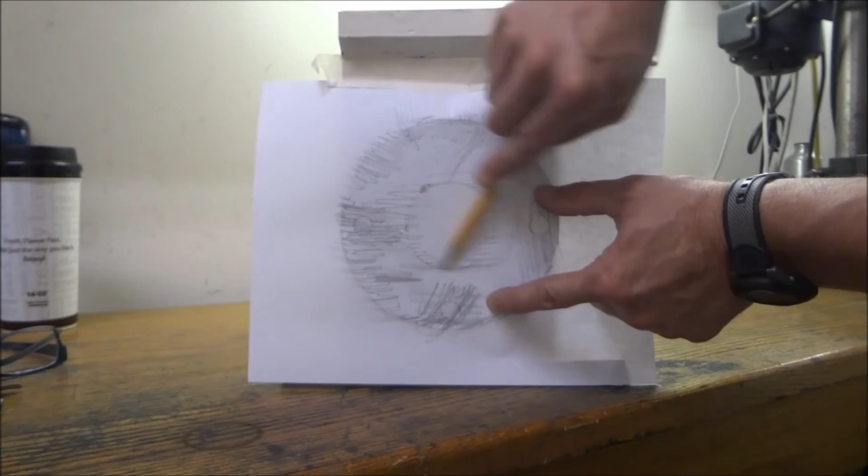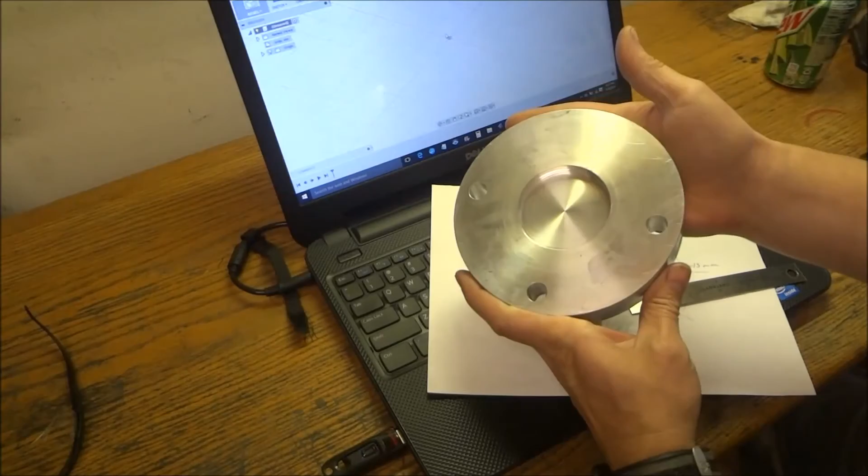Alright, so now that we have our tracing, I just took measurements off of my tracing and off the back of the gearbox, and we're now going to draw it up in Fusion 360, and then we'll go out and we'll machine our spacer, and I'll show you how it's done. Now, as you can see, I've already drawn this up and did the machining, but I want to show you how we did it in Fusion 360.

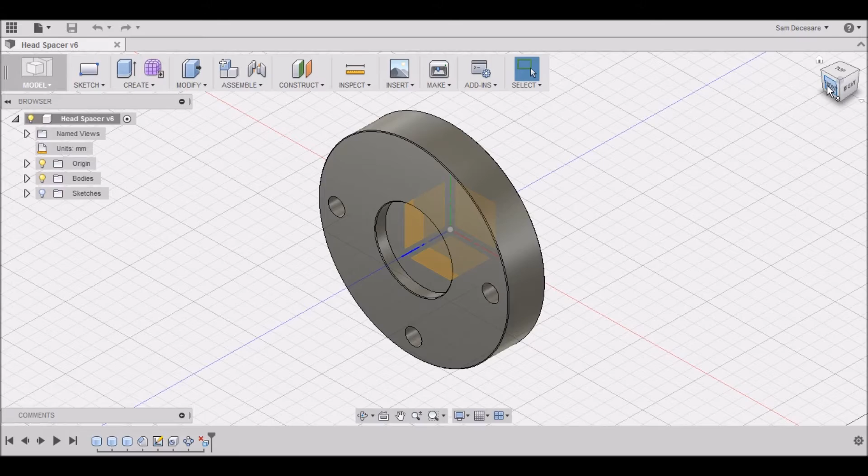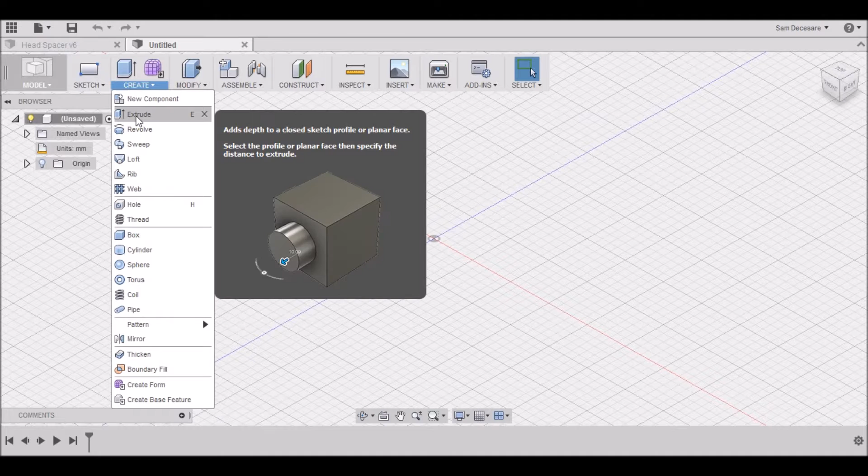So let's get started. Alright guys, so here we are in Fusion 360, and this is our head spacer for the Precision Matthews 727. Pretty simple, straightforward design. So let's get started and we'll see how this was drawn. So the first thing we want to do is create a cylinder. This is our Z-axis, this blue line. So I want to put it on this plane here. And according to our sketch, it's 148 millimeters.

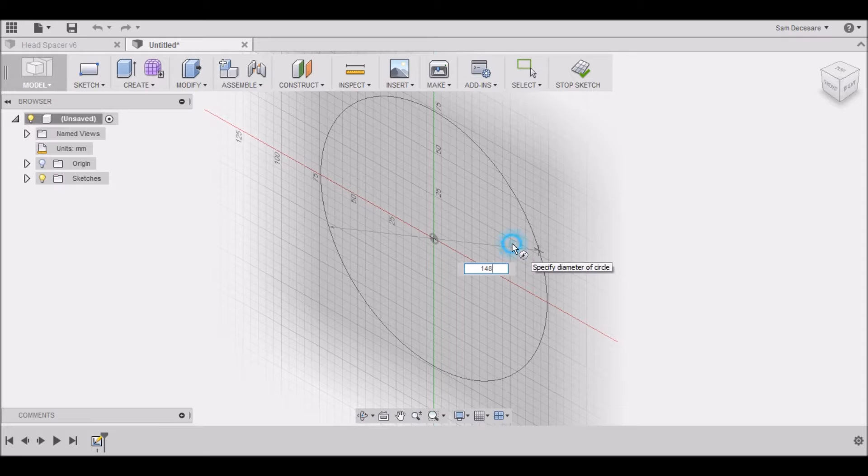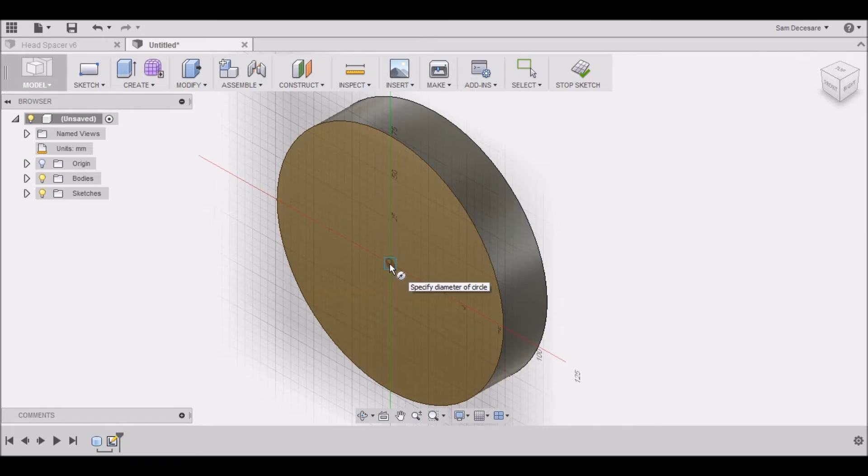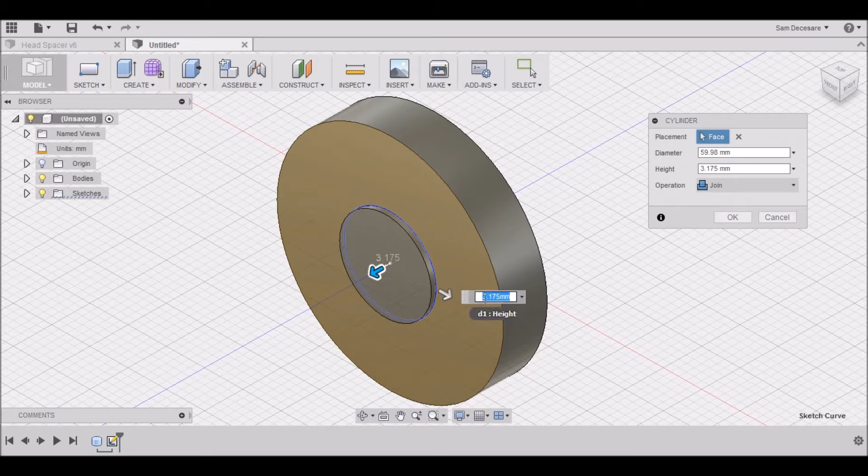Right, and we need to make this 1 1/8 inch, which is 28.575 millimeters. Alright, now we have our basic cylinder. We'll go back and create a second cylinder, and we want to put it on this space here, in the center, and this is going to be our bump out, which is going to go into our spindle, and that is 59.98 millimeters, and it is going to be 1/8 of an inch, which is 3.175 millimeters. Alright, that's our bump out.

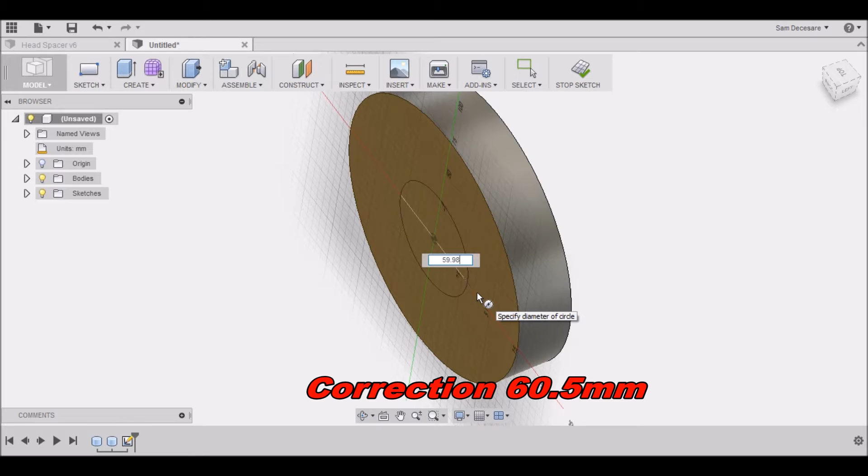And then let's go around to the back side. Right click and we can repeat cylinder. And we'll put it on that surface there. And again, 60.5. Okay, and then this time we want to go in and cut that out. And we want to go 8 millimeters. Alright, pretty straightforward and simple.

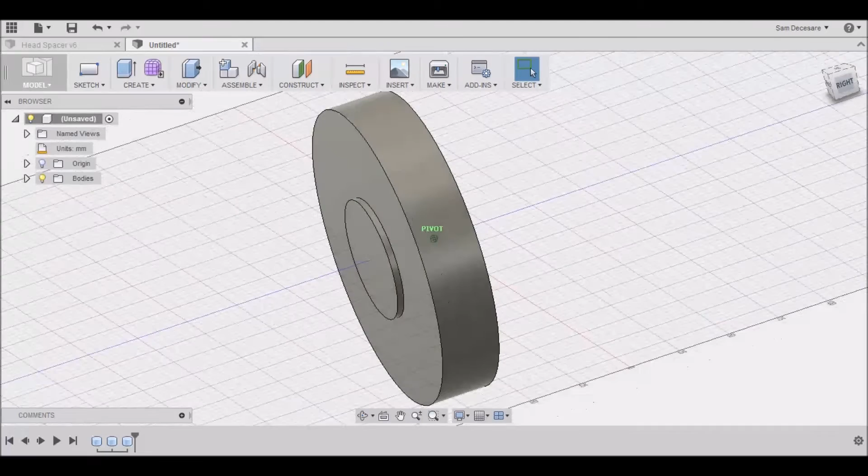Let's do a chamfer and knock some of these corners off. So go to Modify, Chamfer, and we'll select this edge. Hold down Control, select that edge. Go around to this side, Control, select that edge, and this edge. And then we just need to put a slight chamfer on there. Let's do 0.7. Looks pretty good. Click OK.

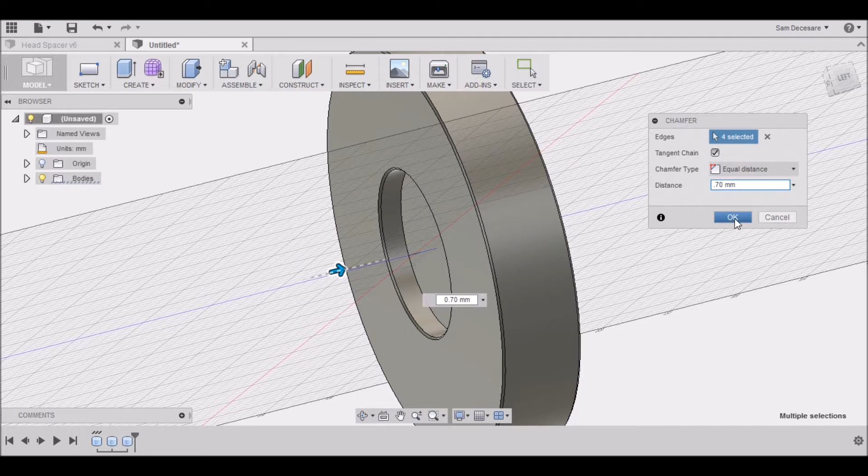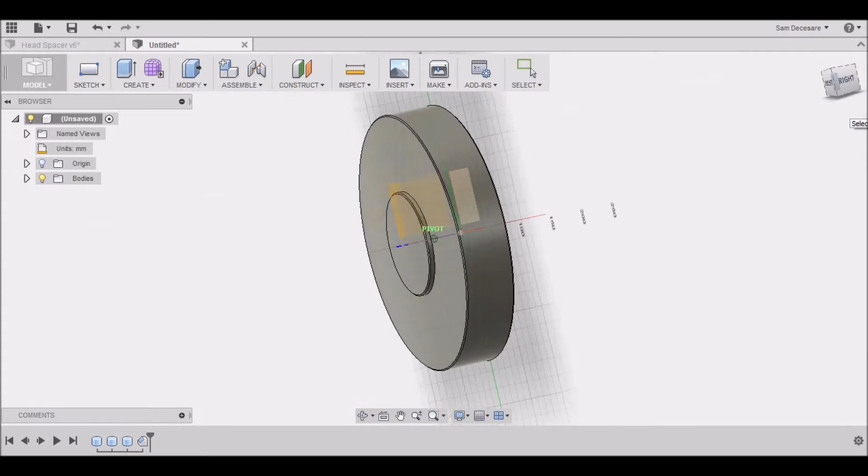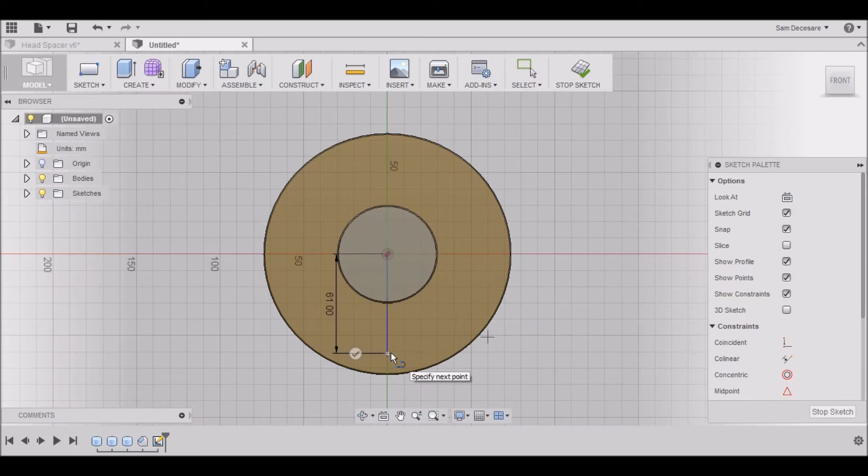Now we need to drill some holes. Next we want to go to Sketch and create a sketch. We can create it on this plane here. Alright, and then hit L for line. I'm going to go to the center. We're going to go down 90 degrees and we're going to go 61 millimeters. Then we're going to go back to the center, hit L, another line, 61 millimeters. And 61 millimeters this way.

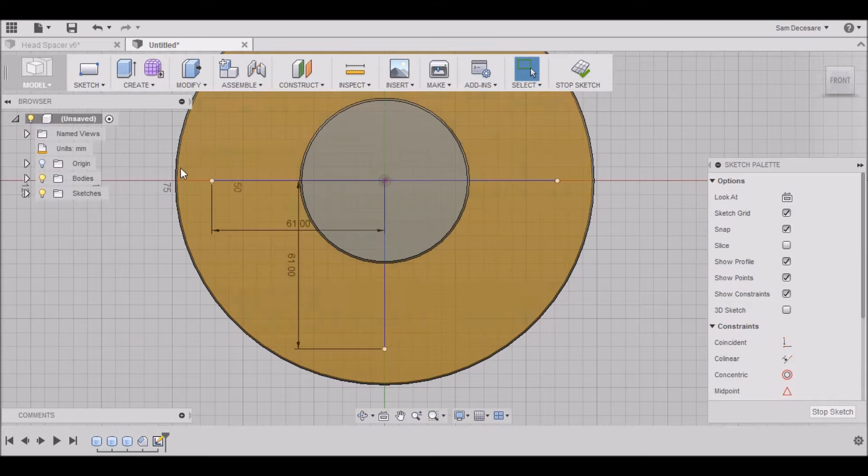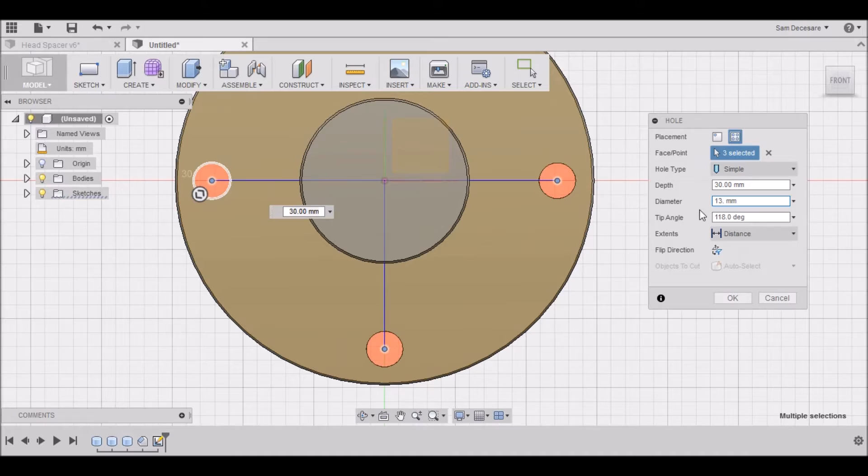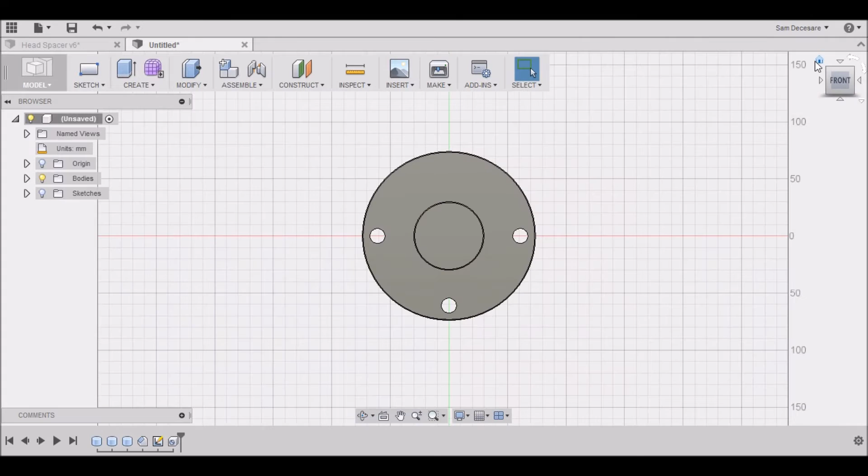Okay, then we want to stop our sketch and then we want to go to create hole. We want to do multiple holes. Here, here, and here. These holes are 13 millimeters in diameter. And 30 millimeters deep is fine. It goes all the way through. Click OK. Turn our sketch off. And there we go. We have our completed spacer. Didn't take very long. Now let's do some CAM for it.

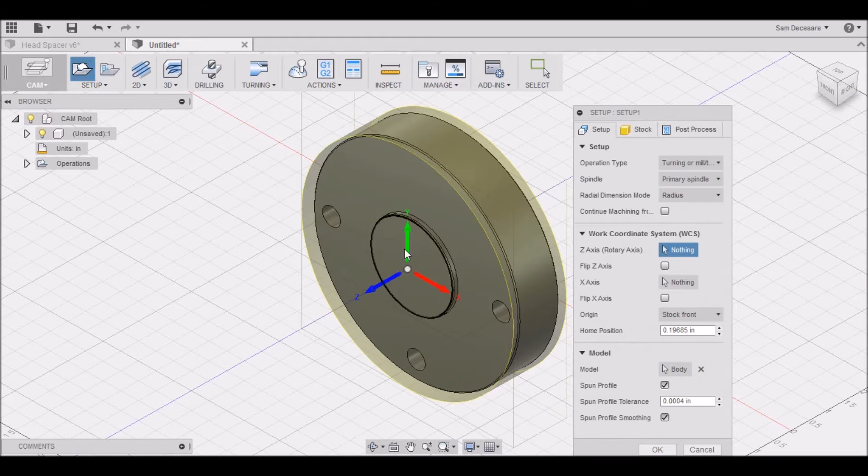So we go up to Model, CAM, New Setup. We're going to be doing turning. Check this spun profile. Because it has the holes in here, if it's a spun profile, Fusion 360 knows that this can't be machined while spinning. So check spun profile, otherwise it'll try to go down into this hole. I've had it do that before, for some reason. I couldn't figure it out, but if you check spun profile, you won't have any issues there. The stock is 6 inches and it's 1.5 inches long.

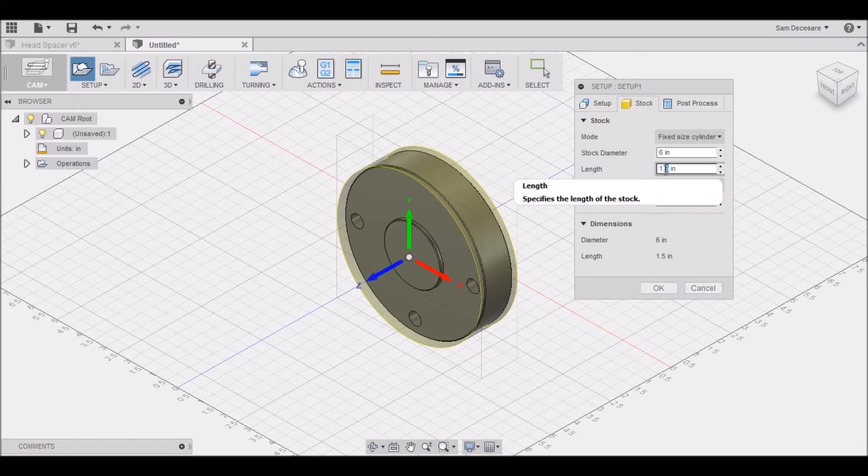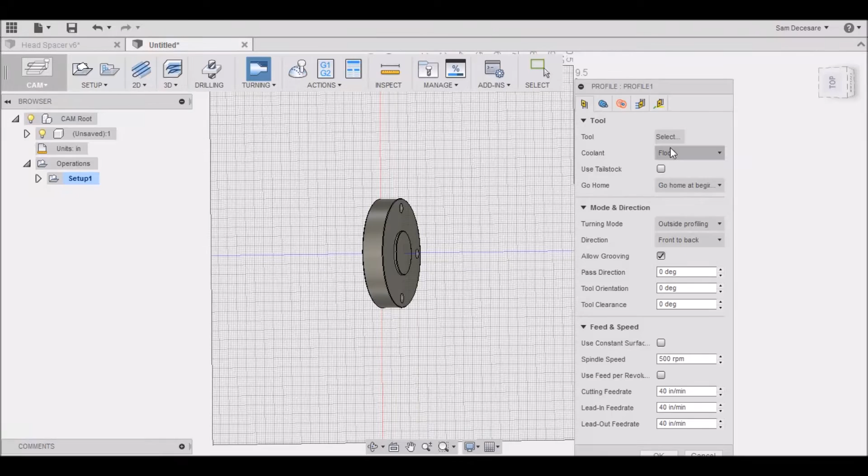Okay. Now the first operation here, let's get this oriented right. Let me tilt it just a little bit. So we want to turn profile. I'm going to be using tool number 2. This is an SDJC tool holder. Go up here to setup. Let me click this arrow and it'll put the X back down here. There we go. Alright, we're going to be going at 5000 RPMs. We're going to be using surface velocity. We're going to use feed per revolution. My feed rate is going to be 0.01.

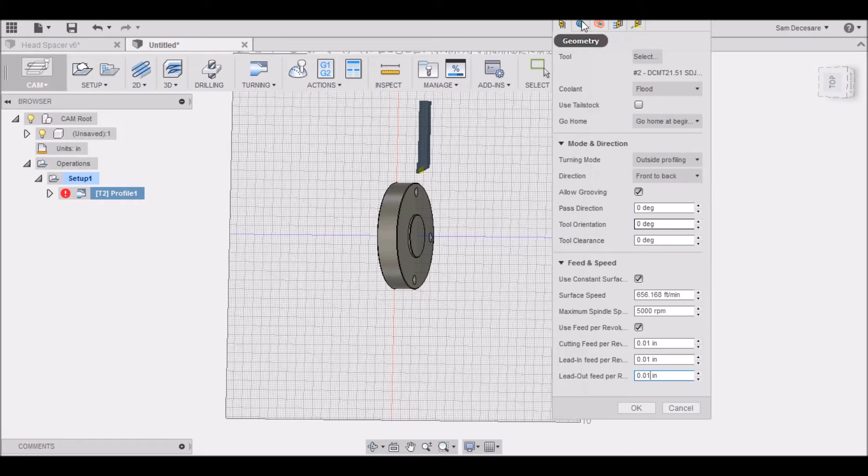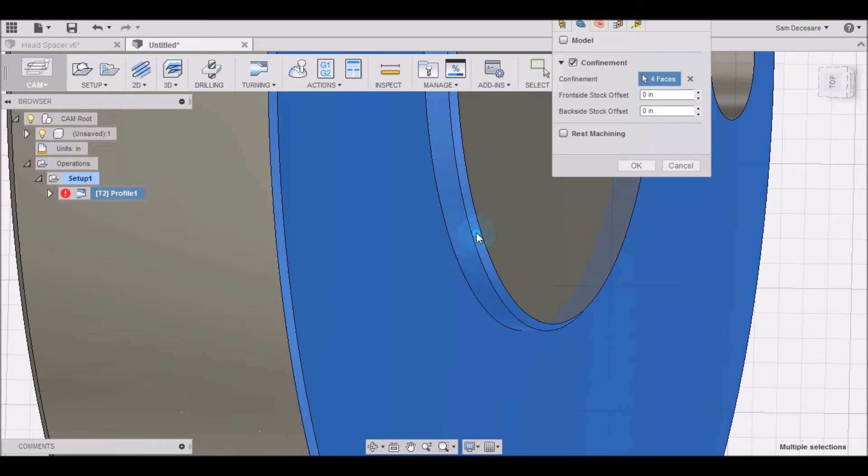Okay. Geometry. Confinement. I want to confine it to this area. This area. Right here. Right here. Alright, let's see how that works out. Step over 0.01. Finish feed rate 0.005. Step down 0.01. Okay, that's on the thing.

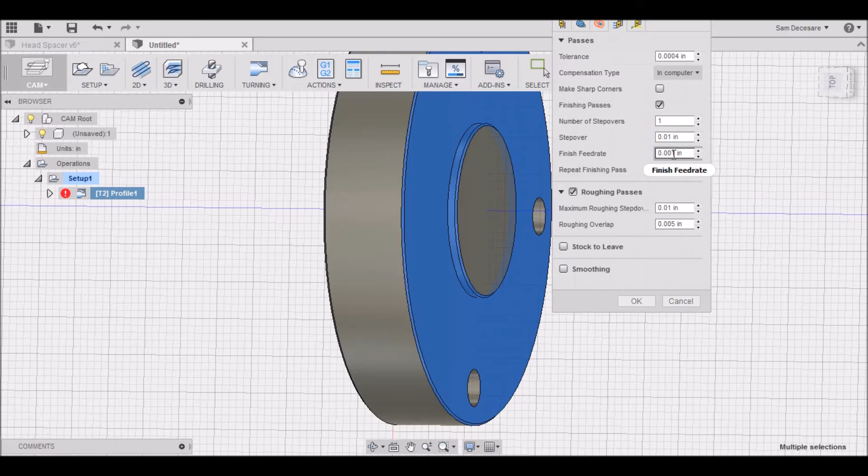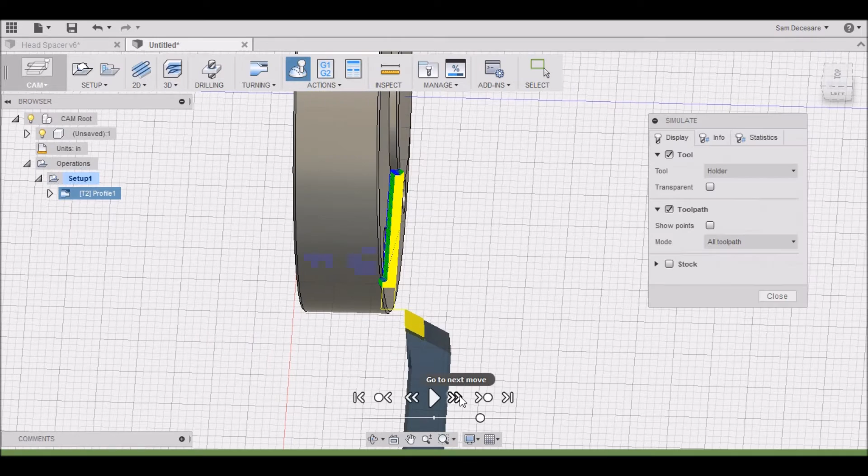There we go. Click OK, see what happens. There we go, we got it oriented in the right spot. Alright, there we go. Alright, let's see what we got here.

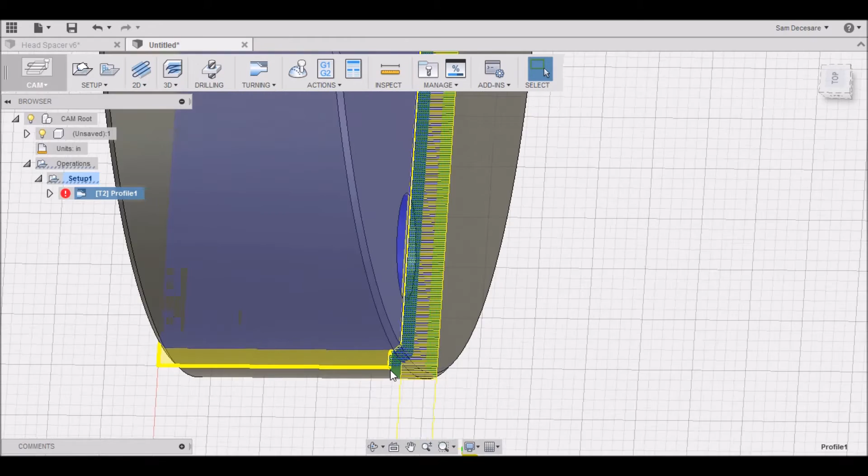Alright. Okay. It's coming all the way up to this curve right here, but it's not machining any of this, and that's good and bad. I need this machined as well. However, it's going to be in a 4-jaw chuck, so I can only do about half of it, and then I'll do the other half when I machine the backside.

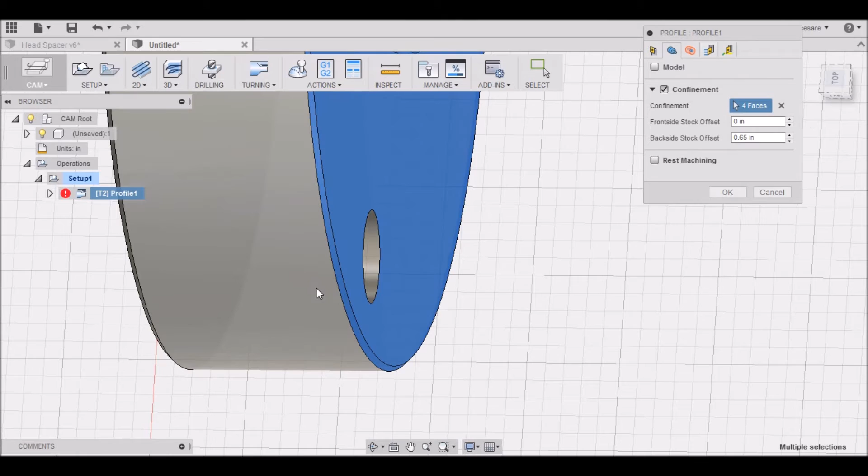So in order to get it to only do half, I'm going to go up to geometry right here, and I'm going to use this backside stock offset, and I'm going to put 0.65, and also for confinement I'm going to add this additional face here. Okay, something went wrong there, so let's go back and check it. Maybe a negative. How about that?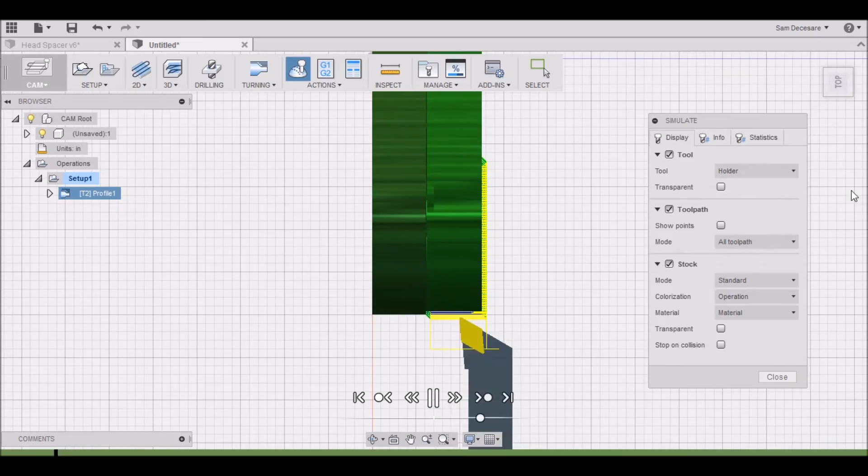So now we'll machine this and then pull out. There we go. Alright, now let's simulate this. See what we've got. Alright, pretty straightforward. We can also get this with a facing. However, I'll do that in a different operation.

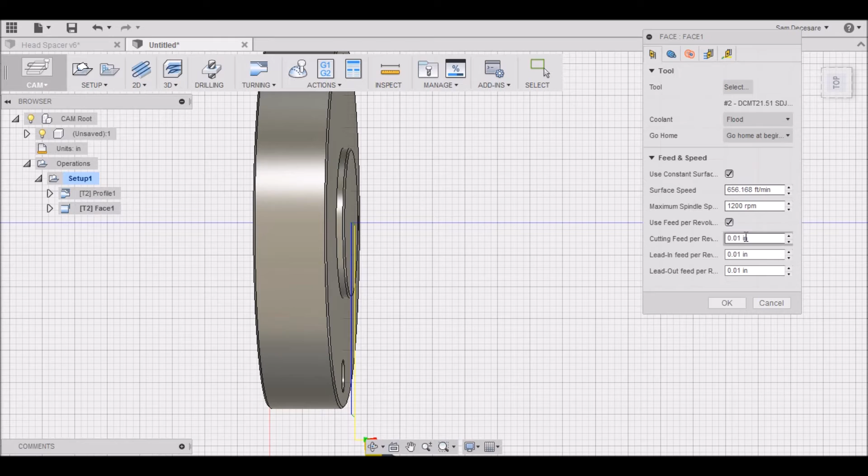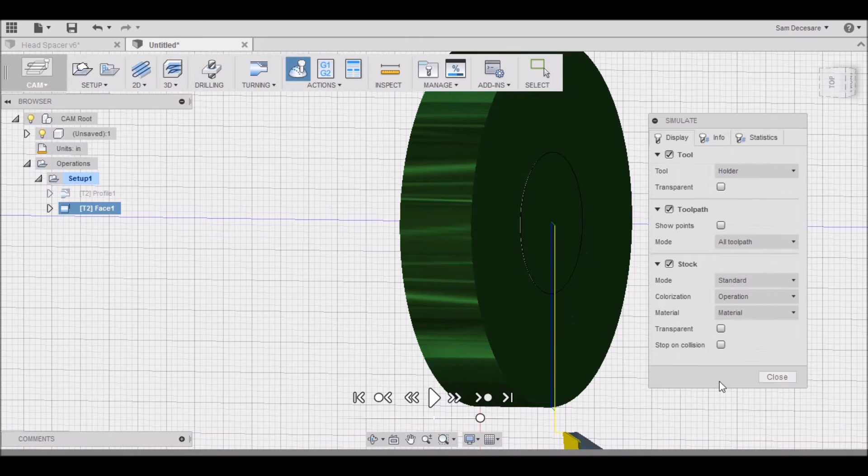So let's do turning facing. Let's actually, we can use the same tool. That's all good. We'll face that whole side there. That all looks good. Alright, let's see what this operation looks like. Alright, basic facing there. Now we can put that in the front.

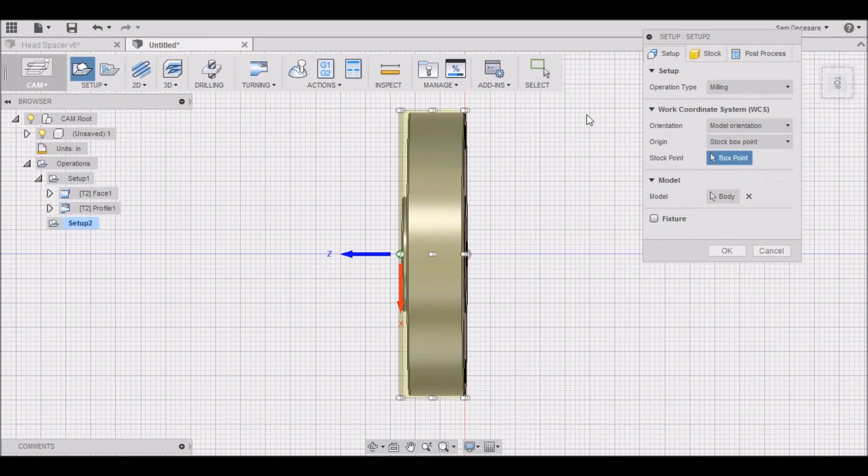Well, that takes care of this particular setup right here. Now we need to machine the back side. So let's get that set up. So we're going to do a setup number 2. And we're going to pop that over to this side. Move that over and that over. There we go. It's going to be a turning operation, a spun profile.

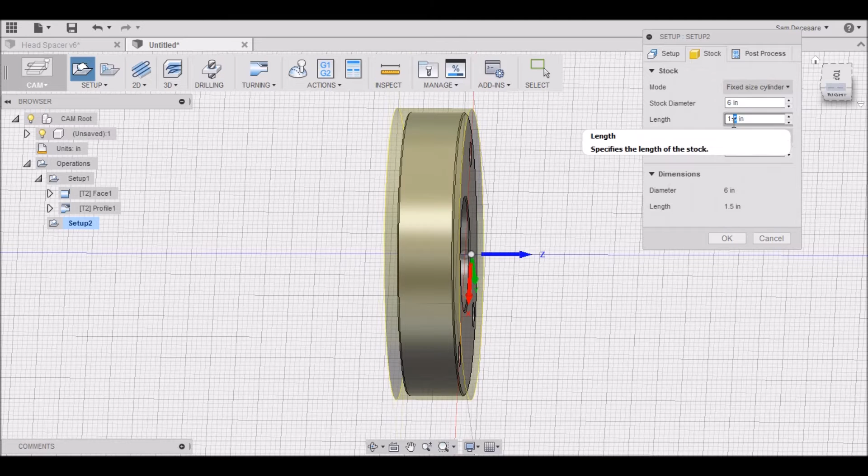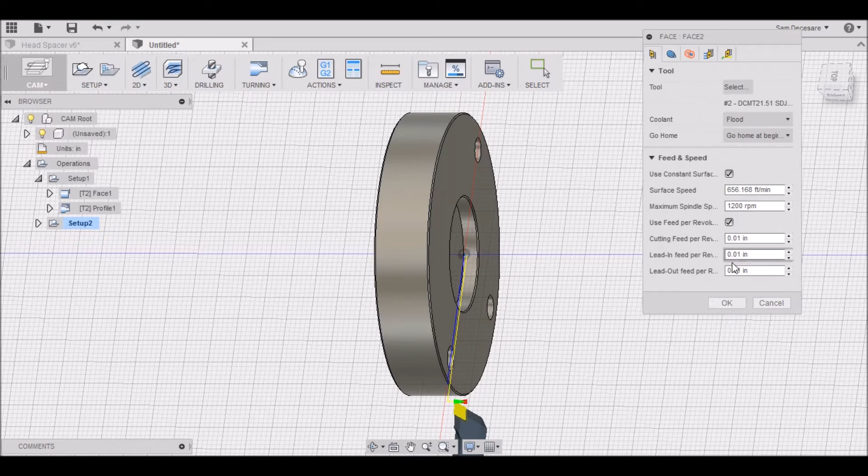That looks pretty good. Okay, change the stock. It's 1.25. Click OK. Alright, that looks good. So the first thing we want to do is, again, we want to face this. Tool number 2 is fine. All the parameters from our last are in there. Let's see if it faces this stock. Looks like it's fine. Alright.

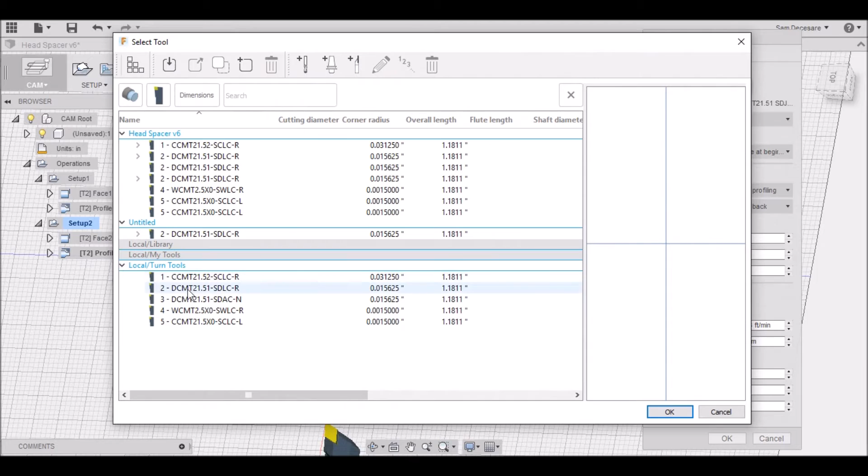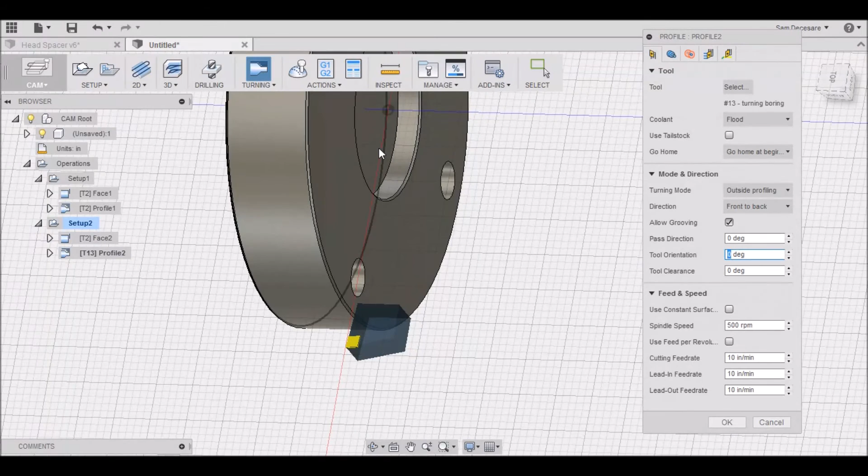And then our next operation will be a profile. Now for this one I'm going to be using a boring bar, which is tool number 13. So we got to change this to boring. Click OK. This is a DCLNR. Click OK. Our tool orientation, you can see how it is. It's already set up because this particular tool is set for that orientation.

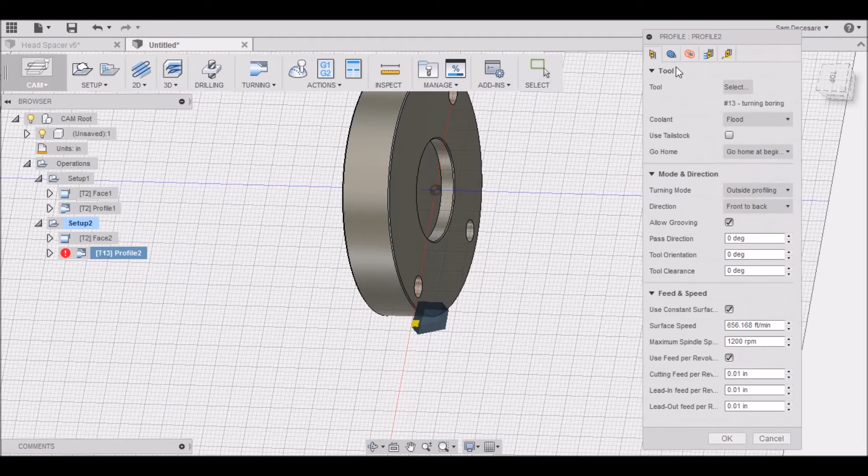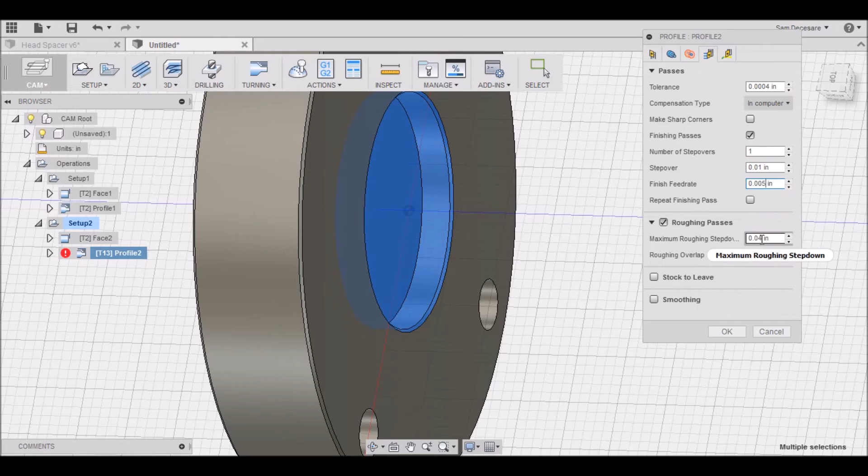I'm going to be doing feed per revolution, 0.01. Our RPMs are 1200. They're actually 1280, but okay, I forgot to set up my confinement here. Here, here, and here. Alright. Let's see. 0.01. Finish feed rate 0.005. Maximum step down 0.04. Alright. See how that looks?

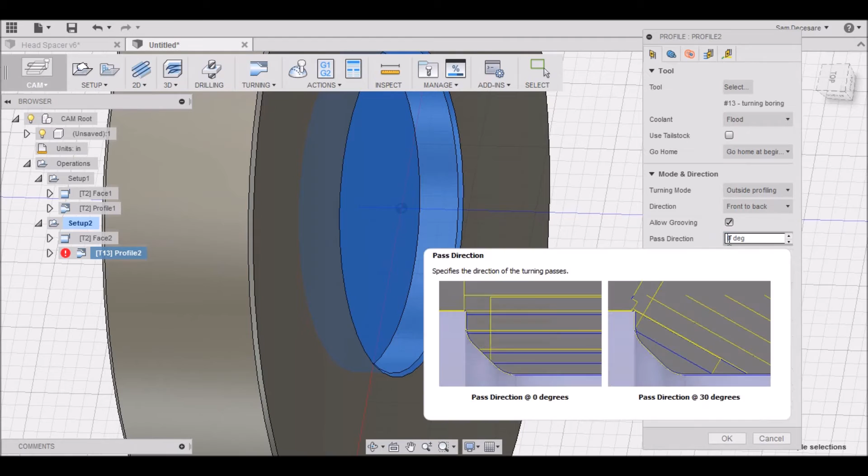It's giving me an error here. Invalid tool angles. Okay, let's see what's wrong with that. Let's go back to edit. Okay, my pass direction, I need to set that up to 90. I need to change this to inside profiling, and then that will be front to back. Okay. Let's see what we've got now.

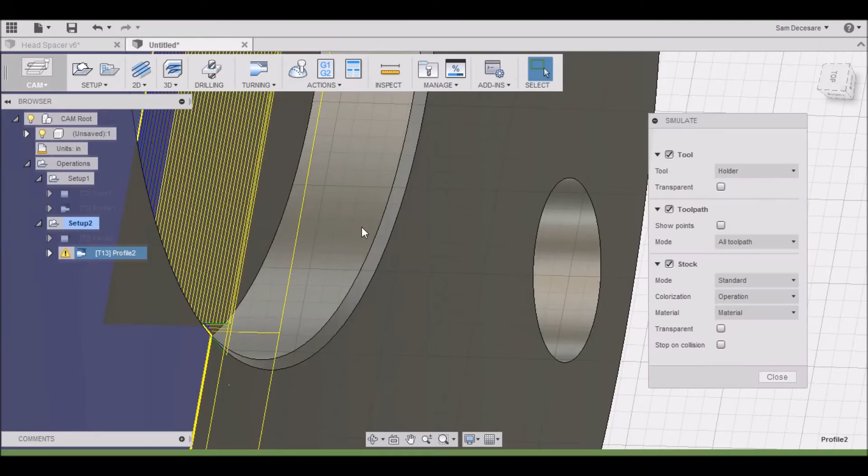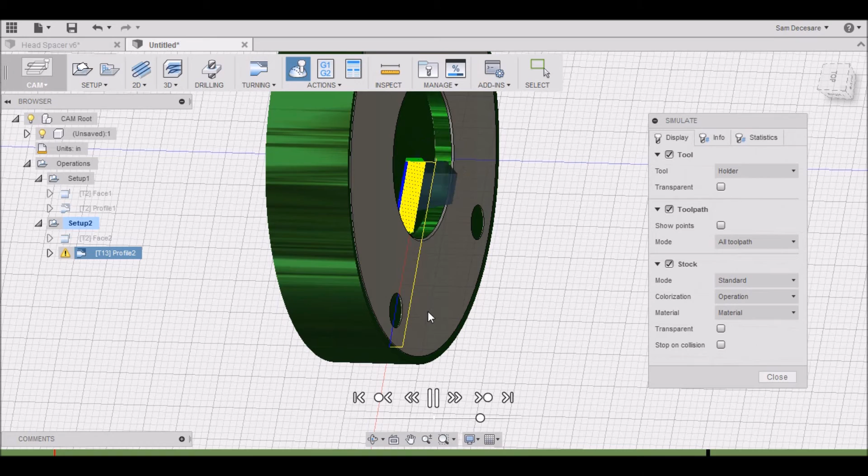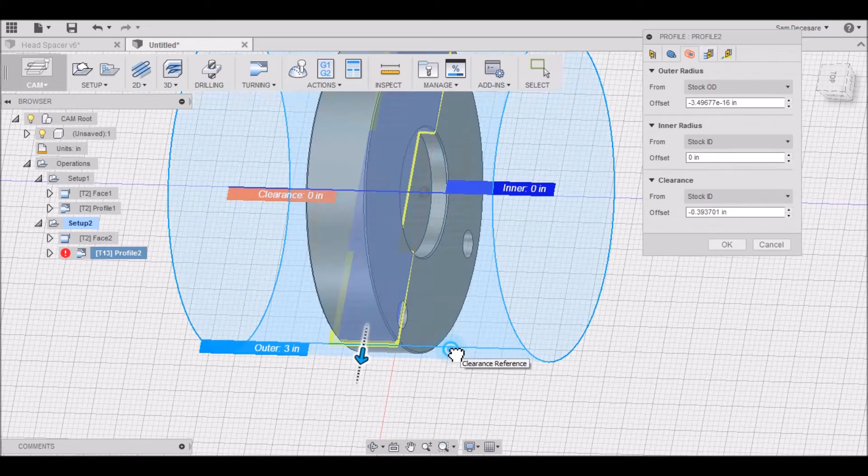Much better. Okay, so you can see that with this operation, it starts out from the outside, and then it's going to face this, and I don't want it to face it with this tool. You can have it just face it if you want. But if you don't want it to face it, then you can edit it and move your clearance. Now you got to be real careful with this because your outside diameter is here and you don't want to cause any problems.

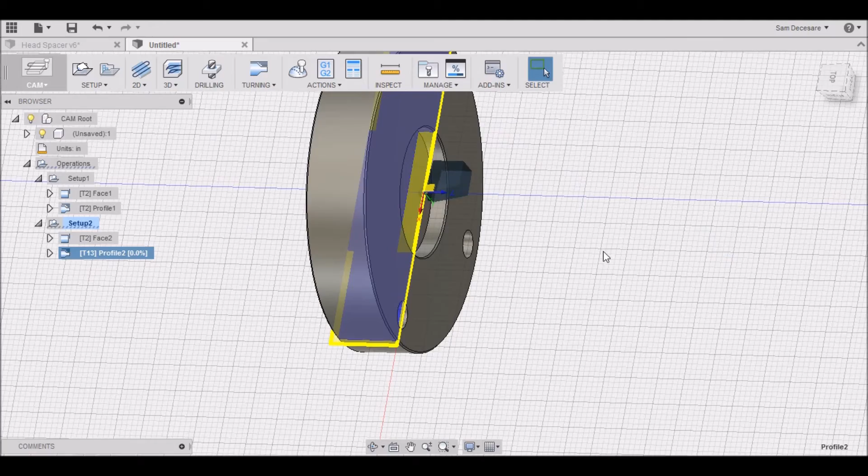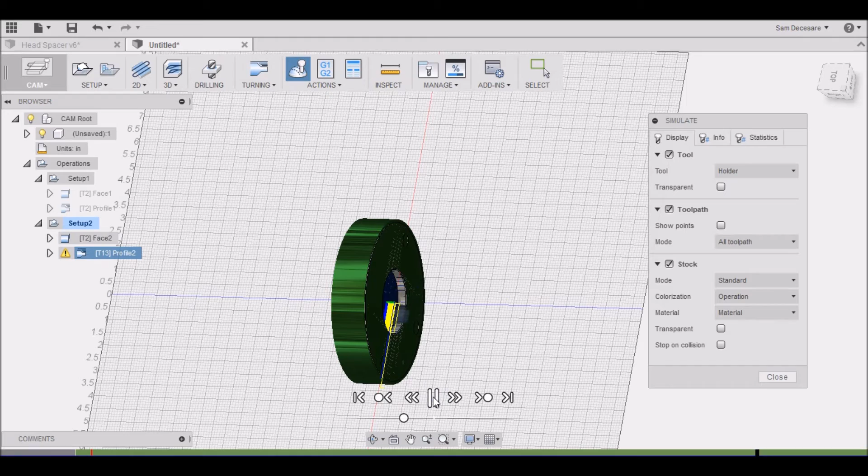Okay. Click OK. There it goes. Alright, so now you can see that it's just going to start right here and only do this particular part. Okay. So let's see what happens if we simulate the whole program. Happened a little too fast. Hold on. Okay. You just got to make sure that you're going to have clearance for your tool if you're going to do it this way. One more operation.

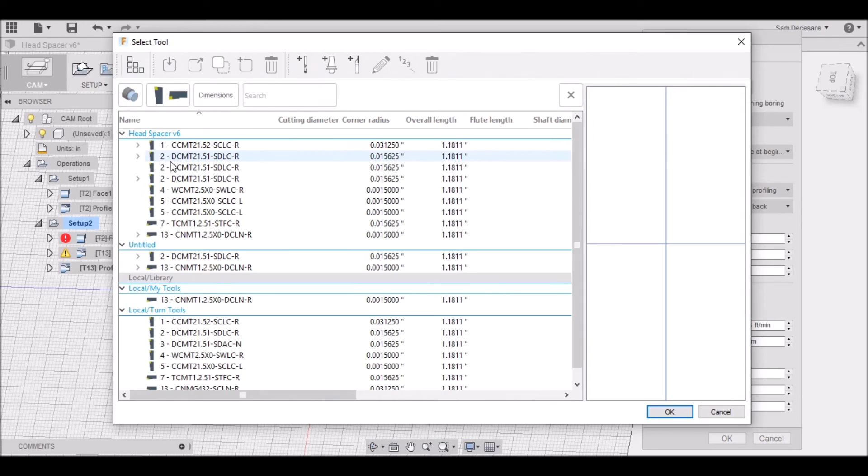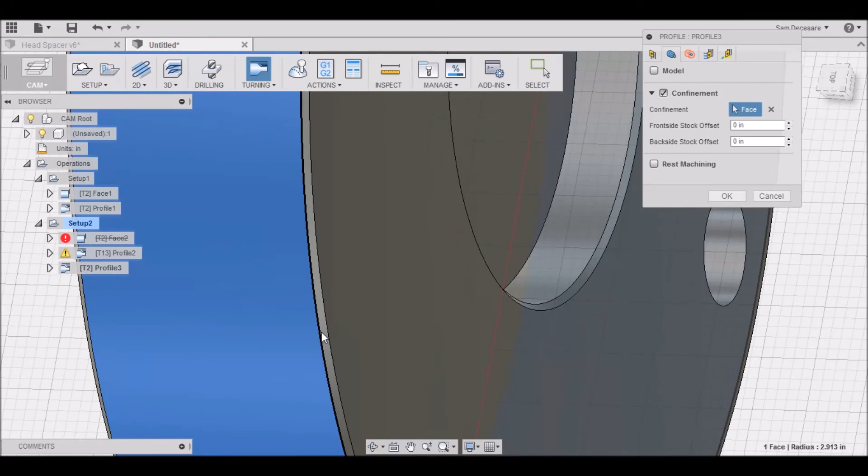We need to get this down to the right diameter. So, need to profile. Tool number 2. Okay. Oh, that looks good. Change this to. Alright. You just want to keep it confined to this area right here and this chamfer. Okay.

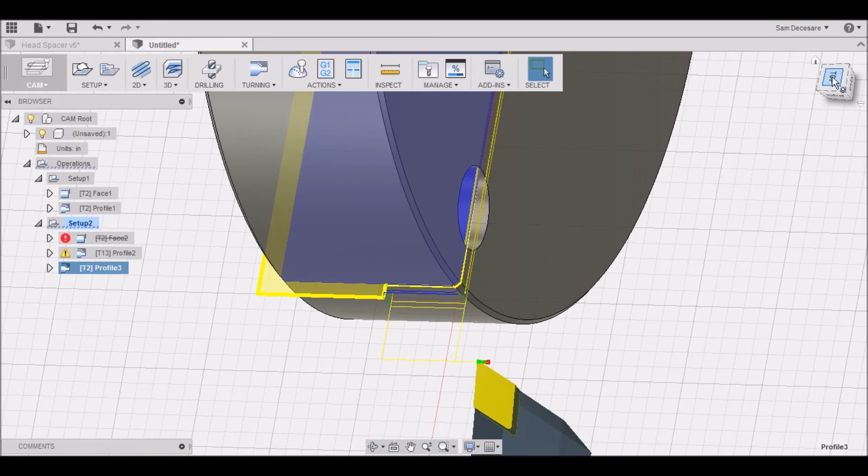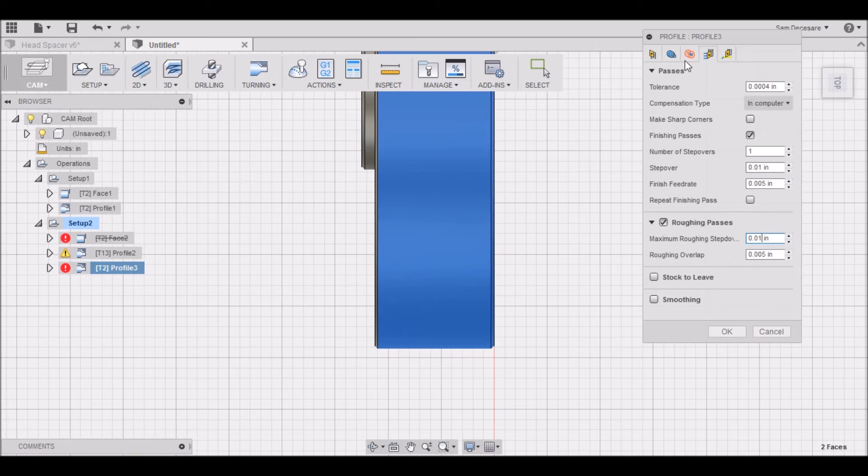Backside offset. Let's do minus 0.65. Okay. There we go. Let's see. Change the step over. Finish feed rate on. There we go. That looks good. Let's give this just a little more.

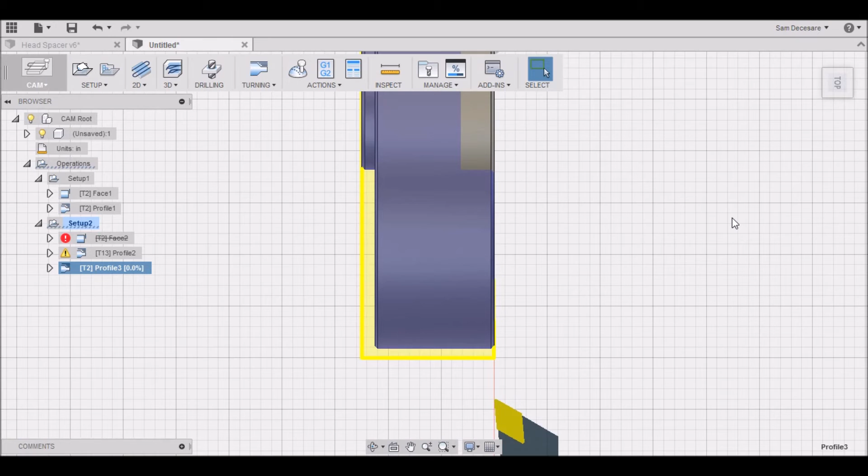Alright, that should be good. Now I'm going to move that operation up to the front here, and we should be good. So that wraps up the cam operation.

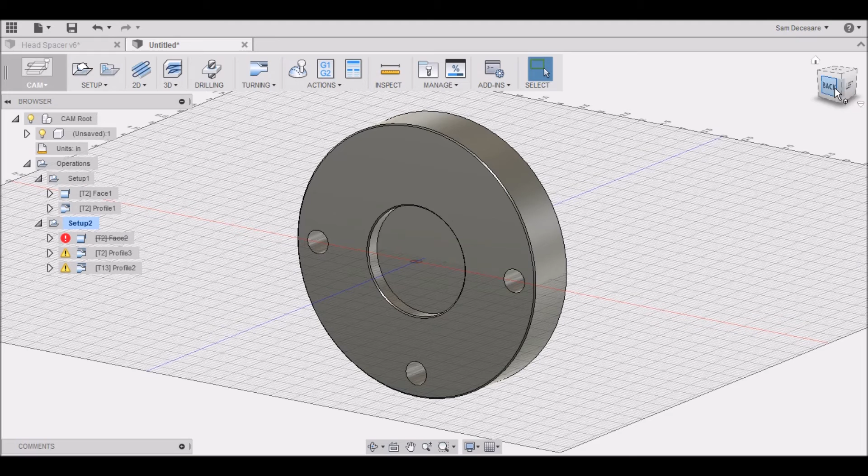Now you just want to post these processes. So let me show you how I post my processes. So I'll go up to setup here, and I want to post process. You want to have the tab here highlighted for the setup. That way you get both operations. Alright.

We want to go up here to turning, and if you do that, you can see all the different turning post processors. Now what I have done is just took the generic FANUC turning, and I have labeled it and saved me one that's just for the G0602, and changed some of the parameters here.

You can do this by going to open configuration, and if you look at this, these are all the different parameters for that post processor. Now I really can't tell you that I know what all of this stuff means. However, there are some things, like these are user defined properties. These are things that, when you're in that post processor screen, will allow you to change some of those parameters.

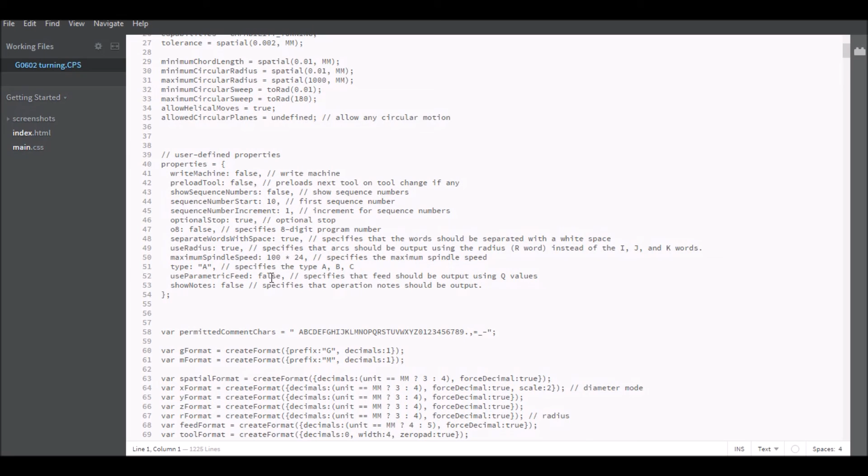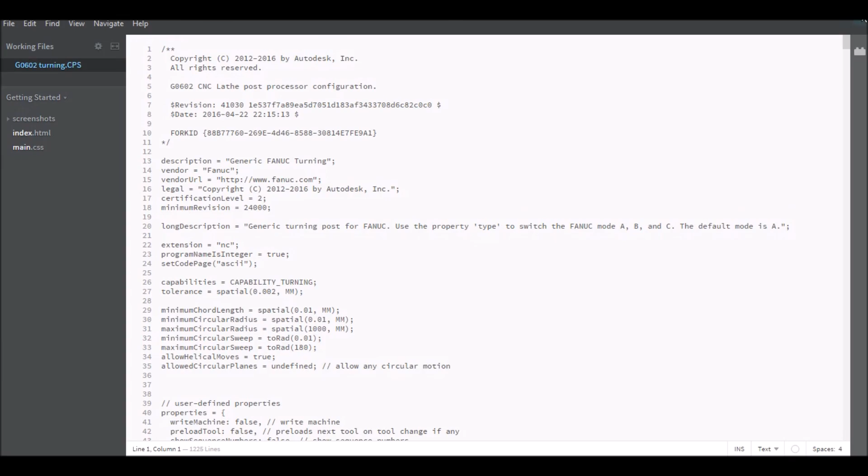And you can just save this, and when you do, make sure you save it as .cps, otherwise it will not be in here. So it needs to be a .cps file. And that's it. Whoops. Okay, so these were the user-defined settings that I showed you earlier. I've got mine set to 2400. Optional stop is no. Line numbers, sequence numbers, right here. Show sequence numbers, I have mine set to no.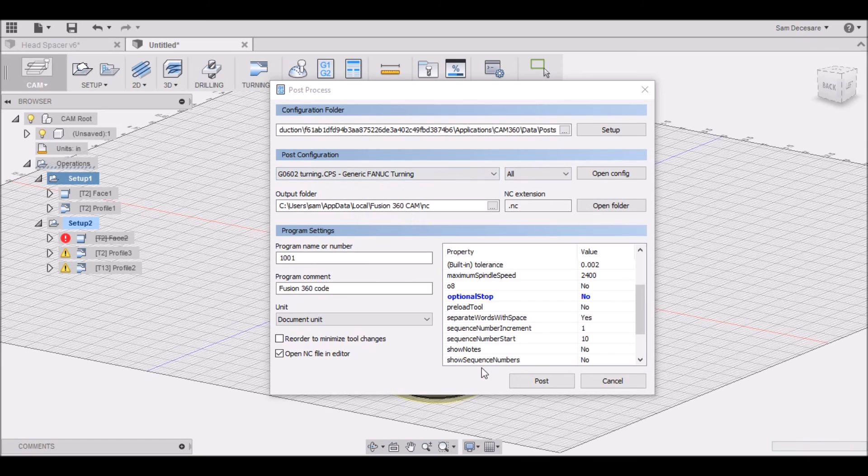So that's all you need to do, and then once you have that set, you can just click on that every time. So we're going to post these processes for this particular operation. And there we have it. Now what I like to do is, when it's in this screen right here, I like to do some editing.

One thing I like to do is, I don't like to use this G28 on the lathe, because what it does is, after the part is machined, it's going to take it to 0, X and Z. And Z0 is way at the end near the tailstock, so I don't do that. It's already going to move it right here. It's going to move X to 6.8, which is away from the stock, and it's going to move Z to 0.1969, which is in front of the stock.

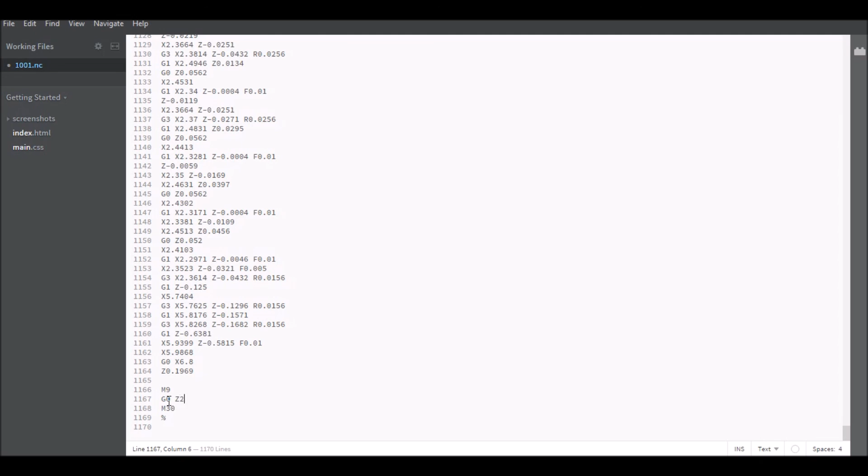If you want, you can move Z a little bit further by doing a G0 Z2.0, and it'll move it 2 inches. So I like to change that, and I also like to get rid of this G28 right here and type in G95, because I want the feed to be per revolution, and not inches per minute. And that's it. And then we can go ahead and save that and take it out to the lathe and start running our parts.

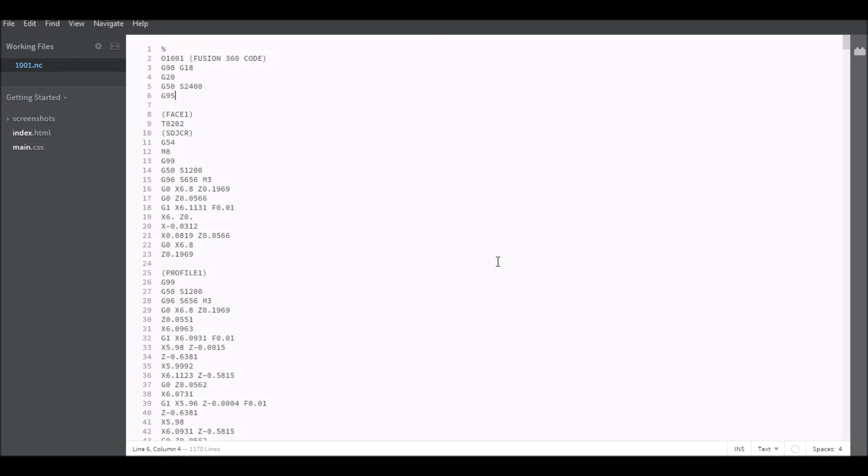Okay, so in the next video we're going to see how it ran on G0602.